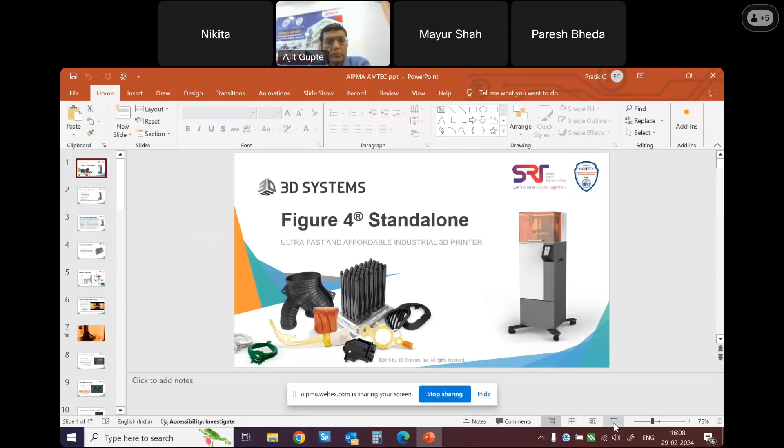Yes, it's visible. Figure 4 is the topic of webinar today, where we'll cover the Figure 4 printer, the technology itself, its material portfolio, the application, and how it is going to bridge the gap between industry and education. So let's get right into it.

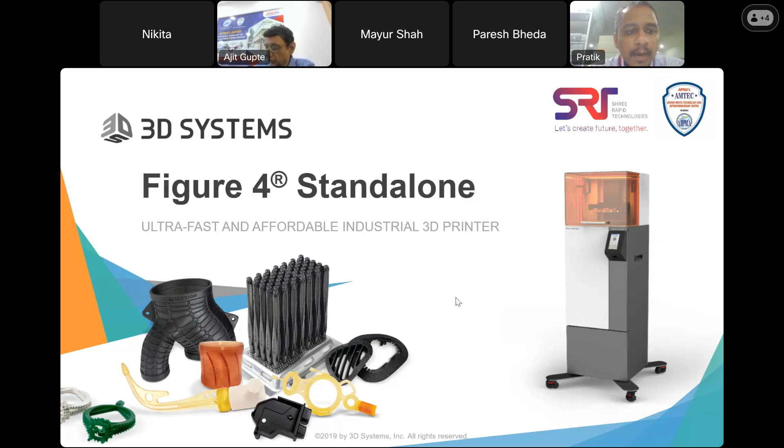Figure 4 standalone is basically an ultra fast and affordable industrial 3D printer. It's a printer based on DLP technology, digital light processing, which rapidly produces photopolymer parts. DLP uses projected light to cure photopolymer resins, curing the entire layer at once. So it's an affordable solution for functional prototyping and low production volumes.

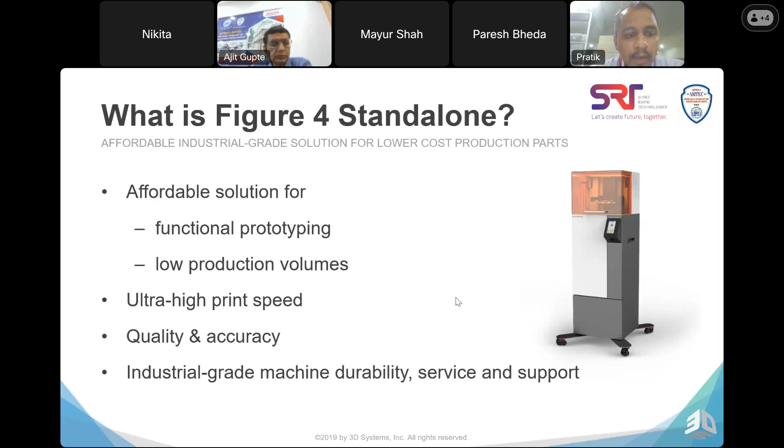It also has ultra high printing speed, which I'll cover in the subsequent slides, explaining how it's able to achieve that kind of speed. And it is known for giving extremely good parts and accuracy.

The build volume of this printer is basically 125 by 70 and 196 in the height. It uses a true HD projector of 1920 by 1080 pixels. So the XY resolution of this printer is 65 microns, and you can produce parts with variable layer thickness ranging from 10 to 100 microns.

It comes with the proprietary software of 3D Systems, that is 3D Sprint, which is also 3D Connect capable. Basically, you can monitor your prints remotely.

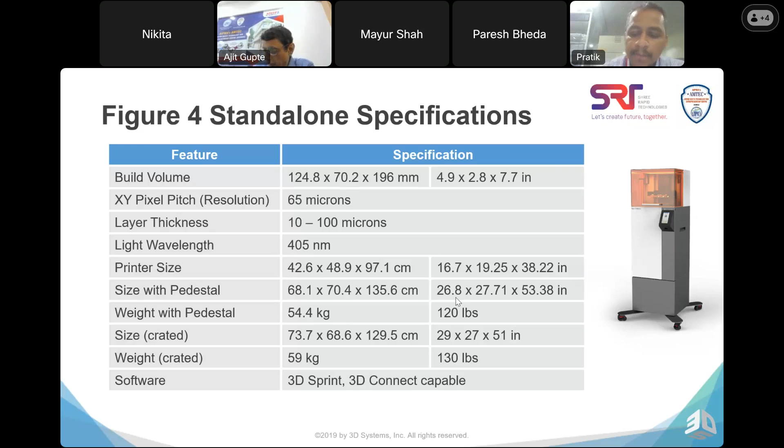So Figure 4 is basically productivity redefined. You can get functional prototyping iterations done within the same day. If you have low volume production, output volumes of up to 500 parts per month are achievable. And you have 3 printing modes, draft, standard, and premium, where you can achieve speeds of up to 100 mm per hour.

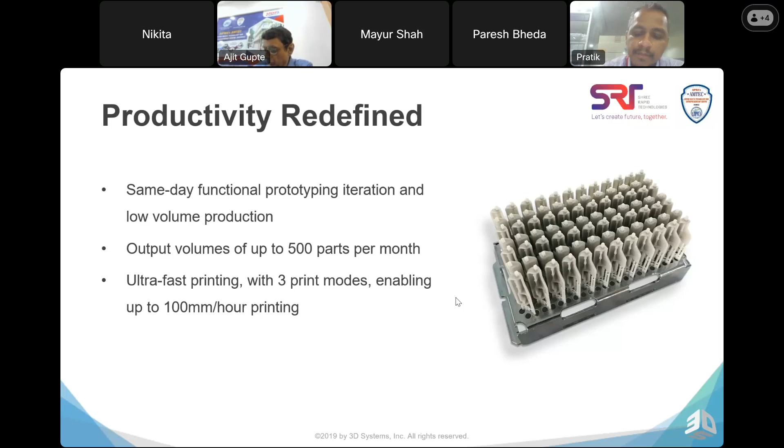Can you see the GIF image here? Yes, this is how the technology works.

Basically, Figure 4 is nothing but DLP printing. It uses a projector which projects UV light, magnified by the lens, covering the entire XY area of 125 by 70. The light passes through the film membrane of the resin tank, curing the liquid resin, which is basically a photopolymer resin. And as the build platform moves up, it prints layer upon layer.

Now the unique thing about this particular setup is that the film membrane of the resin tank is oxygen permeable. It forms a thin layer of oxygen window on top of the resin tank film, so when the resin is being cured, it won't stick to the film of the resin tank. Rather, it will stick to the build platform as the build platform keeps moving up.

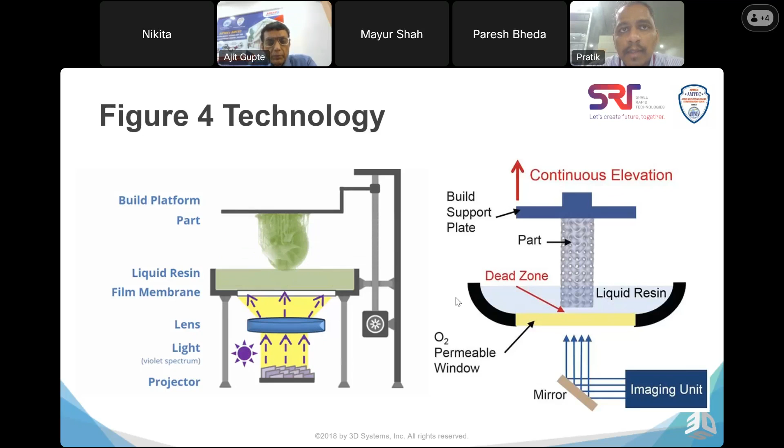So there are no peeling forces acting on the part. The part won't stick to the film membrane, so there are no peeling forces, and no pause in between where the part would peel off from the film membrane. So there is continuous elevation, and that's how Figure 4 is able to achieve ultra high speed printing.

Like I mentioned earlier, Figure 4 is used for low volume production, fast prototyping in tens and hundreds of parts per month. I'll just play the video here.

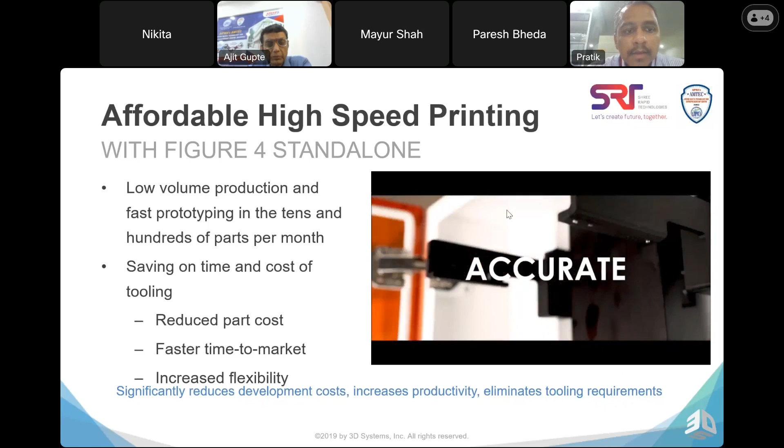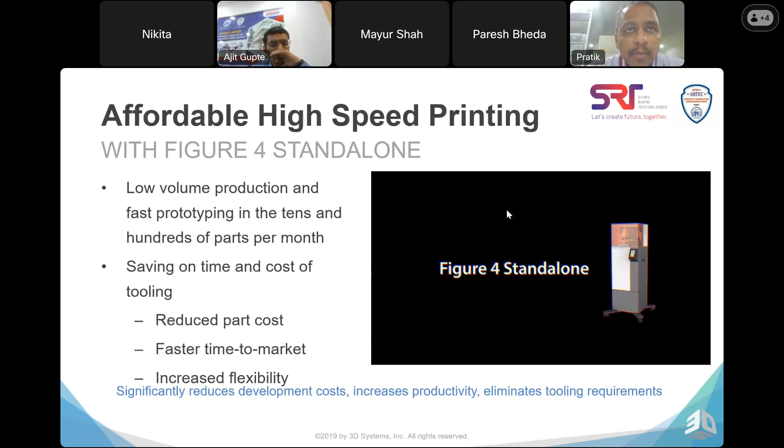So you can save on time and cost of tooling. The conventional mode of making prototypes would be to make tools, where you would inject plastics and get prototypes. So if you have to do multiple iterations, that would increase your per part cost. Rather, you can just 3D print your prototypes, do quick prototyping iterations, and save considerably on time and cost of tooling.

So there's reduced per part cost, and also you can market your products faster.

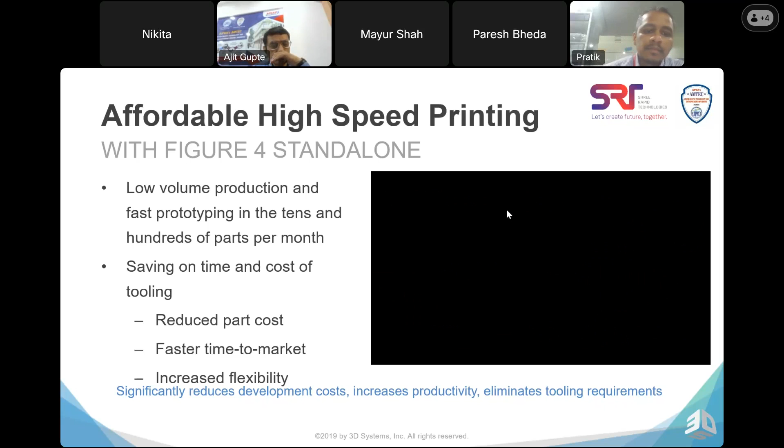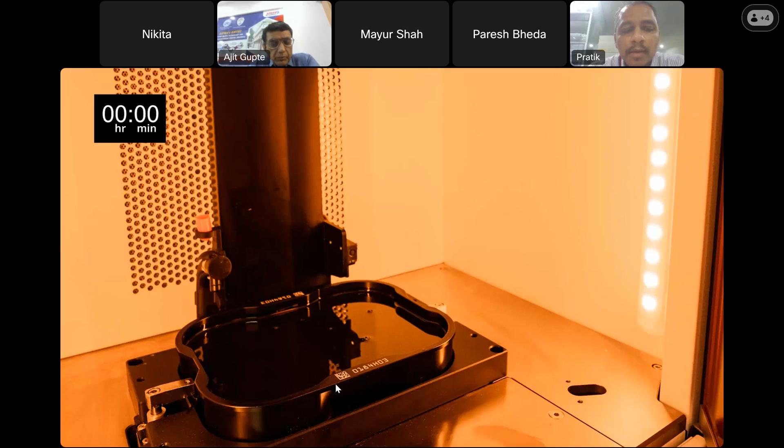I'll just play a short video of another variant of Figure 4 standalone. This is not standalone, this is Figure 4 modular, which is not covered in the webinar. The only difference between the modular and standalone is that this has a height of 346, standalone is 196, and also this has an auto resin dispensing system. I'll play the video and mention what I'm talking about.

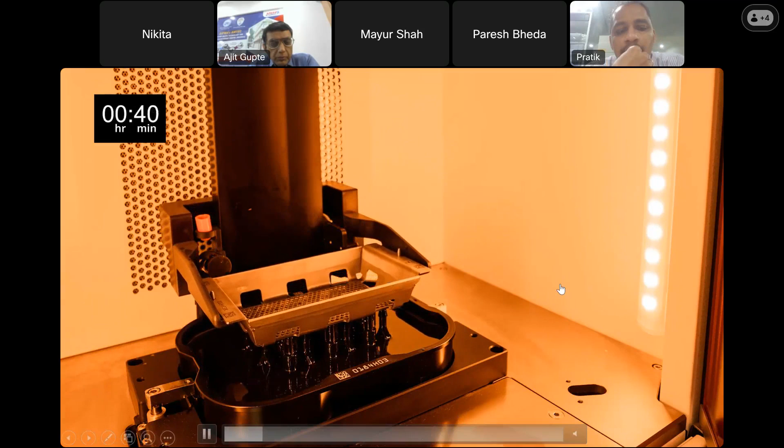The point being here, you can not only arrange the parts in the XY area, but you can also stack the parts in the Z direction, one above the other. So you can get increased throughput.

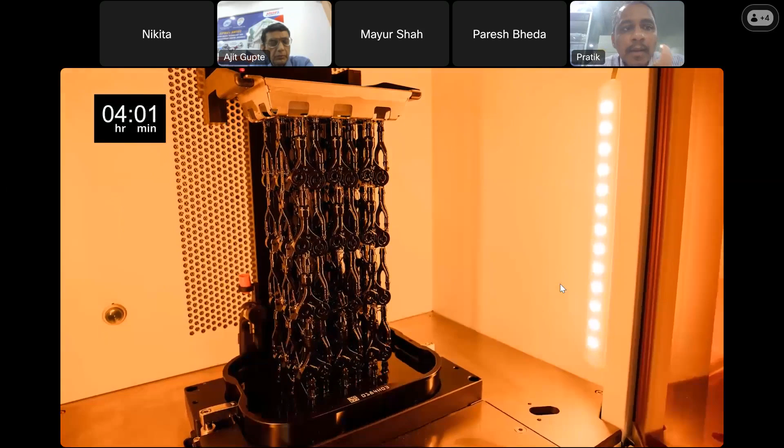Now you'll see here the print time is approximately 4.5 to 5 hours, and you got 120 parts within that time. So imagine these number of parts, whether or not they're achievable by conventional tooling methods.

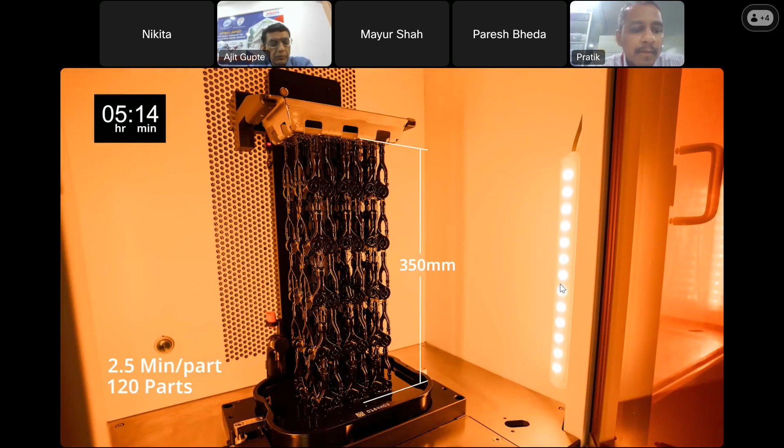When we compare it with room temperature vulcanization silicone molding, Figure 4 is quite affordable with reduced time to first part, compared to 6 days with RTV casting, down to only a matter of minutes with Figure 4.

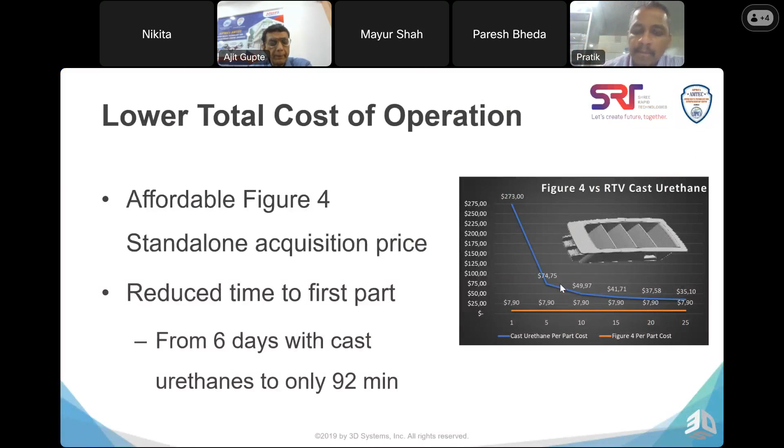It's also accurate to 6 Sigma. Figure 4 delivers on accuracy and repeatability. Generally you can achieve up to plus or minus 100 microns for the first 25 mm of the dimension. But through our experience, we were able to achieve accuracies of up to 10 to 50 microns plus or minus.

That's how accurate the Figure 4 printing is. You can see some figures here for a specific tough gray resin with a process capability index of 2.46. A CPK of 2 equals 0.002 ppm out of spec. So that's how accurate and repeatable the Figure 4 is.

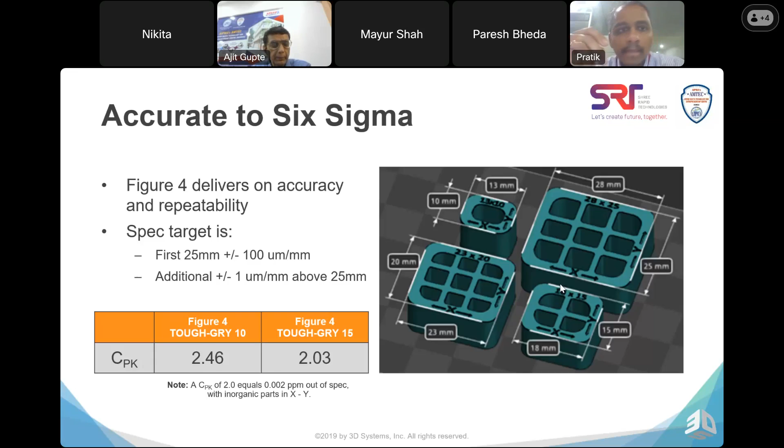As I mentioned earlier, Figure 4 standalone comes with the proprietary software from 3D Systems, that is 3D Sprint, which is extremely user-friendly with an intuitive interface. The file preparation for loading and printing is quite easy, even for someone who doesn't have experience with CAD or any kind of software. They will learn this software within a couple of days to a week.

To get more hands-on experience on the software and printer, you can enroll in IPMA's AMTEC course, or you can even book a demo at SRT's Customer Innovation Center here at Marol, Andheri East. So you can get a complete know-how of the 3D printing process, the workflow, right from build preparation to printing and post-processing.

And of course, 3D Sprint eliminates the need for costly software seats that are usually offered by third-party vendors.

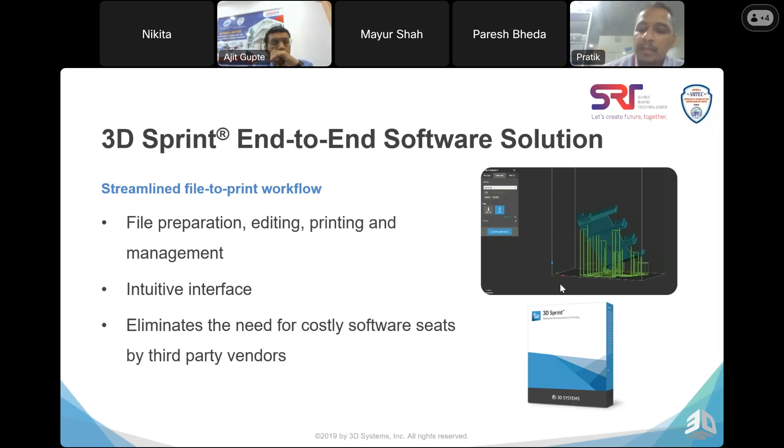Now we'll jump on to the Figure 4 material portfolio, that is the kind of options that are available with Figure 4. Around 14 engineering materials are available with Figure 4. We'll go through some of the major ones which are majorly used in the market.

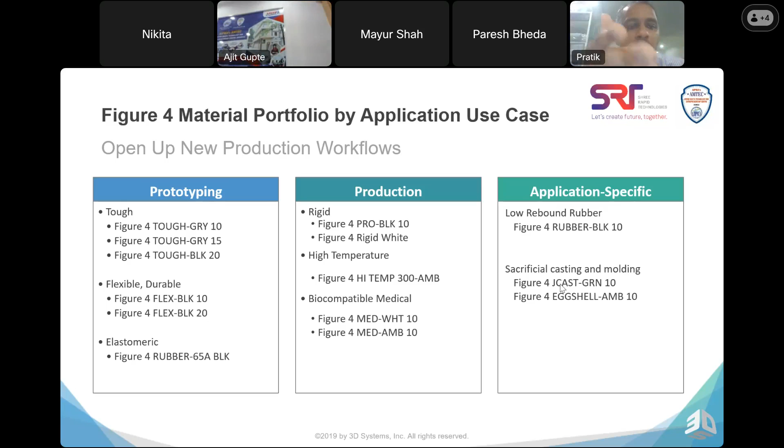Roughly they are categorized into prototyping, production, and application specific. If you have to use tough ABS-like materials, I want to stress that these are not thermoplastics basically. These are photopolymer thermosets which simulate the properties of end-use thermoplastics like ABS, PP, or PC. So if you need properties of ABS, which is your end-use material, you can use one of the tough ABS-like resins to build your prototypes, and then probably simulate the results with that of actual thermoplastic ABS.

For general use, ideal for prototyping and modeling, we even have translucent and semi-transparent materials which simulate the properties of acrylic, PMMA, or PC. There are also castable and sacrificial materials with which you can cast metal parts.

Tough ABS-like or durable PP-like materials which resist breakage for assemblies. Even high-temp materials are available which can withstand temperatures over 300 degrees Celsius. Dental and medical materials are available, and of course low shore, elastic, and silicone-like options with rubber-like materials.

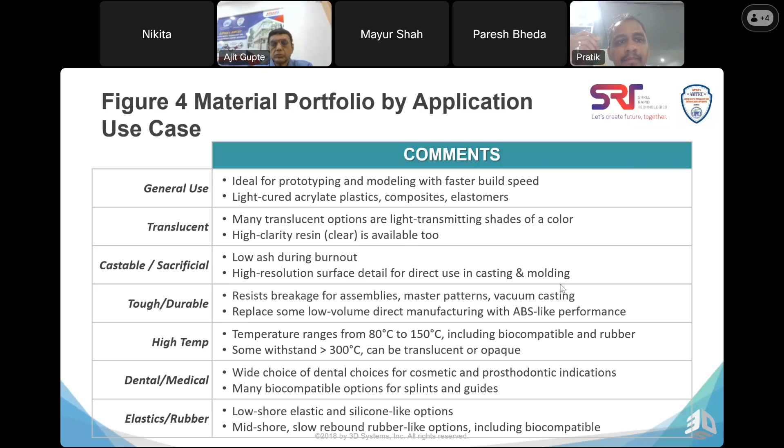To start with, Figure 4 Pro Black 10 is basically your go-to material for production of plastic parts. Go from CAD to manufacturing line in one day with toolless same-day production. It's a high precision resin producing parts with a smooth surface finish and exceptional sidewall quality, and it has excellent mechanical properties. So this is the most versatile material that 3D Systems has come up with.

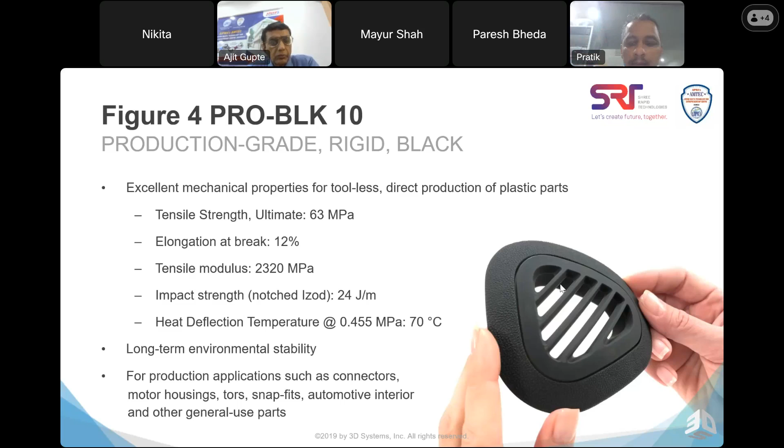Generally speaking, it simulates the properties of an ABS PC blend. Where you would want ABS-like properties, it works fine. Where you want PC-like properties, it still works fine. So this is the most versatile material that 3D Systems has come up with.

Another material is rigid white. If you want same day production grade opaque white rigid plastic parts with biocompatibility, polished surface finish, and long-term mechanical properties stability, this is your go-to material. Applications include electronic enclosures and small components, parts or devices, motor housings, and of course snap fits. It's quite difficult to achieve snap fit parts with thermoset resins, but we have been able to achieve it with rigid white, rigid gray.

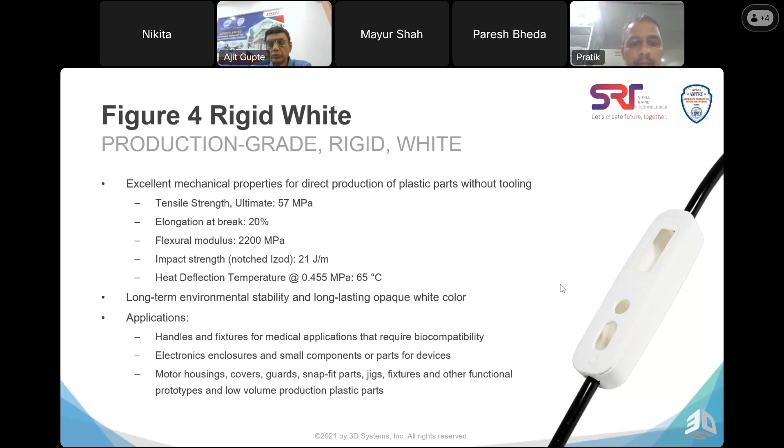This is one of the most unique materials of 3D Systems, which is the High Temp 300 Amber. It's basically an ultra high temperature resistant material with no secondary thermal post cure required. It's used in applications which require high heat resistance. It can withstand temperatures of over 300 degrees and has a modulus of 4000 MPa. It is well suited for testing of high temperature components in applications including HVAC, consumer appliances, motor enclosures, stators, and molds.

We have actually printed a mold insert with this material where we were able to inject around 100 PP parts. We designed a closure, a bottle cap, and made a mold insert out of it, and then we tested it. We were able to achieve around 100 samples.

Depending on the design complexity, you can produce a small batch of parts ranging from 20, 50 to even over 100 parts. Of course, it won't work like a metal injection mold tool; however, you'll have to compensate for the high temperature and injection pressure. So it is always possible. You can validate your part designs and your mold designs with this material.

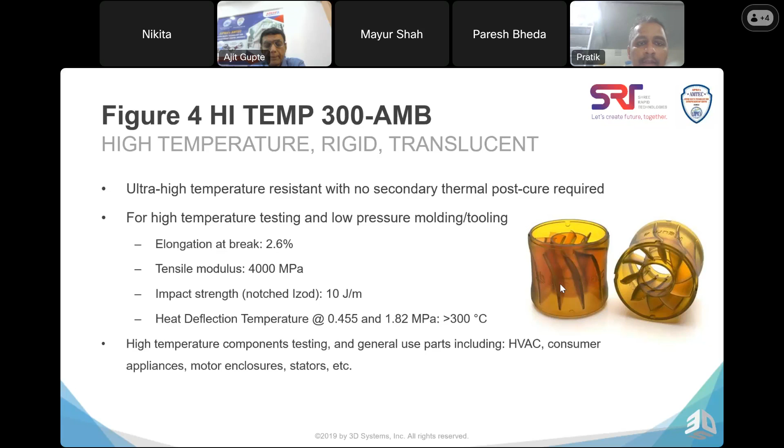Figure 4 Med White 10. This one is a rigid white material for a range of medical and industrial applications, including where biocompatibility is needed. This is also sterilizable by autoclave, and suitable where thermal resistance is required over 100 degrees. It delivers parts with excellent feature resolution and high definition.

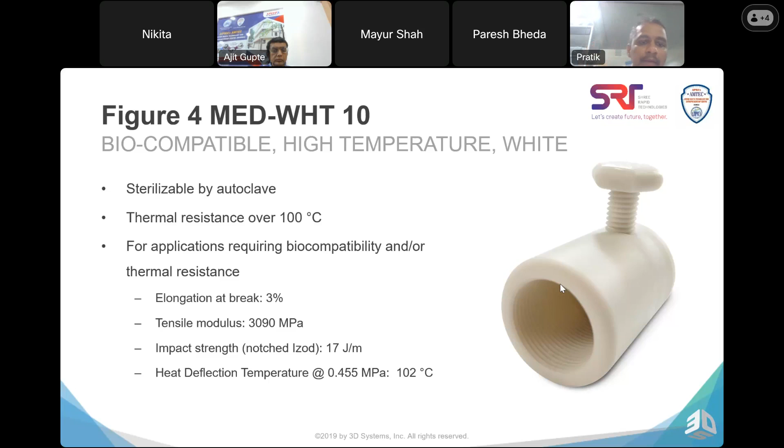Another one in the same category is a rigid translucent material for a range of medical and industrial applications, where it is translucent so that you can visualize the fluid flow. It also delivers parts with excellent feature resolution and high definition.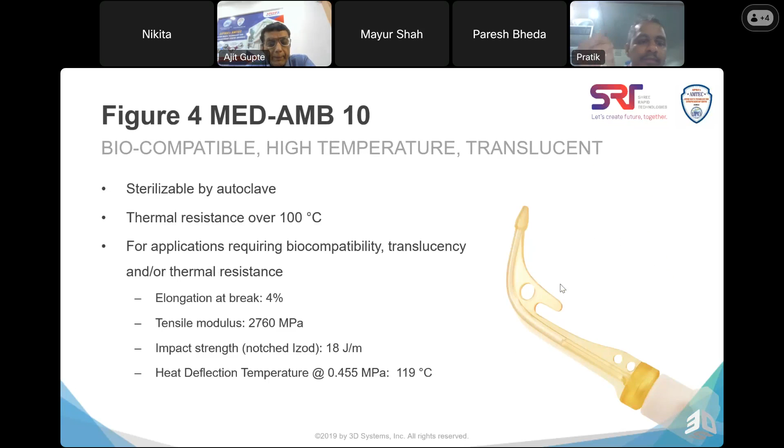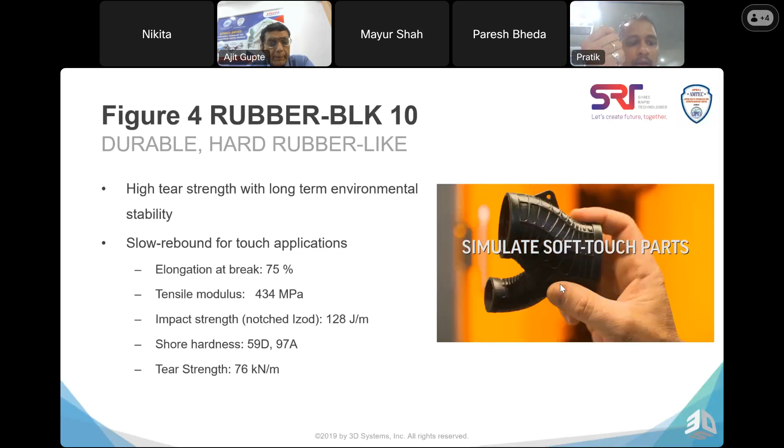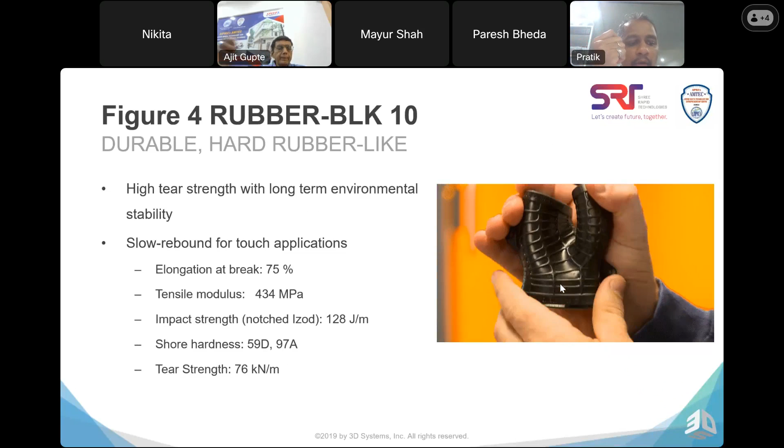Where you need high tear strength with long-term environmental stability, this is one of the unique materials, Rubber Black 10. It has high tear strength for hard rubber-like parts with slow rebound for touch applications like grips, handles, and bumpers, etc.

Eggshell Amber is a process-optimized material for production of sacrificial tooling for casting silicone and other materials. It is specifically engineered to withstand liquid silicone injection at high temperature and pressure, and has intentional brittleness to shatter easily from silicone once the mold is filled and cooled. Its amber color allows for visualization of the injected silicone, and it also has a high heat deflection temperature, which are preferred properties for injectable molds.

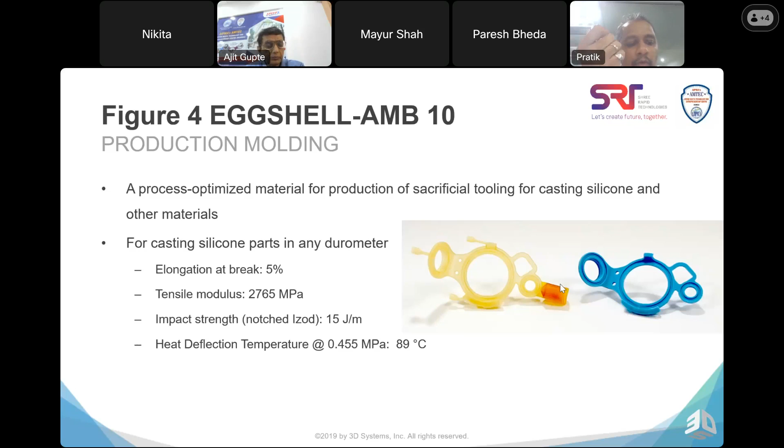And these are from the tough ABS category: Tough Black 20, Tough Gray 10, Tough Gray 15. These are basically ABS-like materials. They give the look and feel of injection molded ABS with long-term environmental stability.

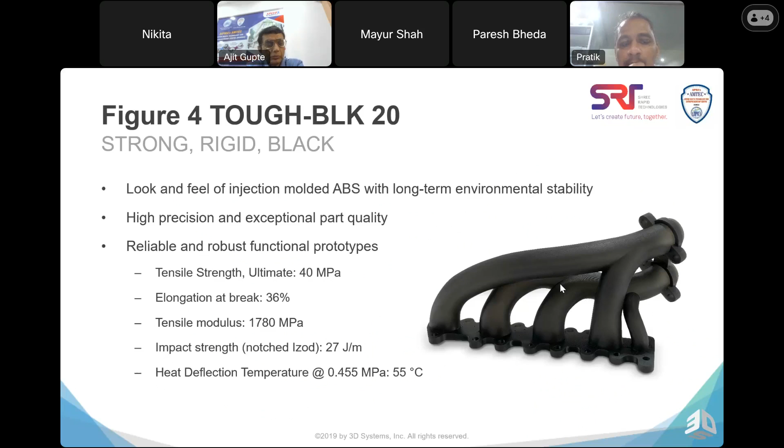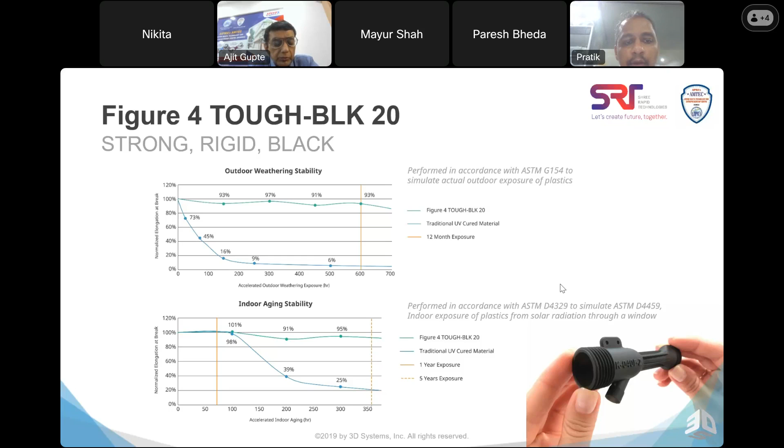Now, every material from 3D Systems has been tested for long-term environmental stability. When these materials are used for indoor applications, they will last for up to 5 to 8 years. If used for outdoor application, the life is up to one to 1.5 years. Since these are photopolymer resins, they are sensitive to direct UV exposure, so their life would reduce if used outdoors.

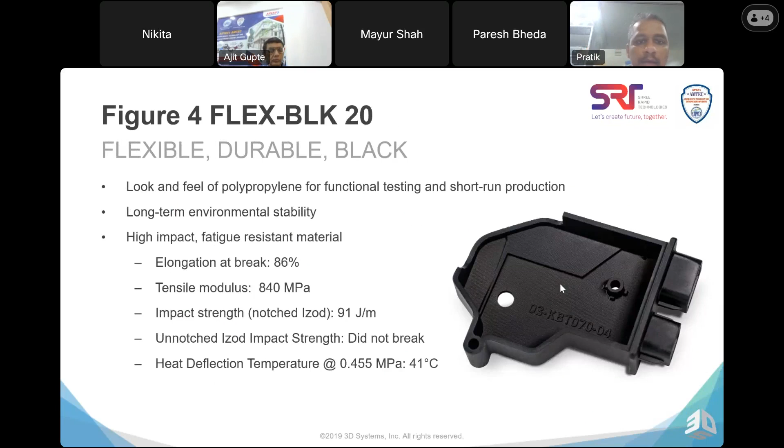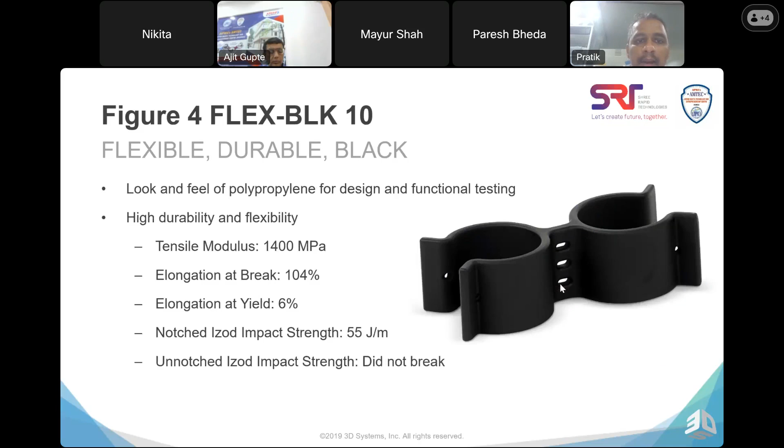There's a PP-like material, Flex Black 20, which gives high durability. Another one from the same category is Flex Black 10, with high durability and flexibility. I'll run a video here so that you get to know what I'm talking about.

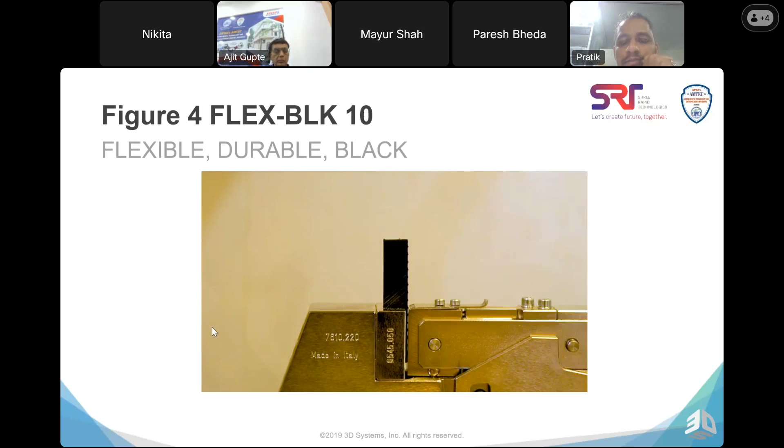There has been so much material development that earlier, people would use resin-based 3D printing systems only for the purpose of aesthetics, form, and looks. But 3D Systems has come up with so many materials now which you can actually use for testing functionality, not just form and fitment, but also functionality, replicating the properties of end-use thermoplastics.

Another material which is rubber-like, having a shore hardness of 65A, is ideally used for prototyping grommets, seals, hoses, sealings, keypads, and any kind of vibration dampening components.

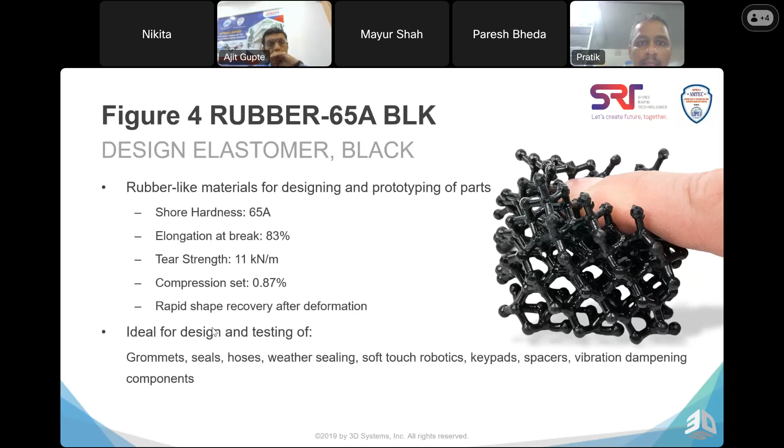J-Cast Green, for jewelry applications, is optimized for investment casting of jewelry patterns.

So to sum it up, these are the material options available with 3D Systems Figure 4 standalone. There's a resin for almost every application there is. It covers the entire application range, and you have material options which match the properties of end-use thermoplastics, be it form, fitment, or functionality. There's definitely a resin available which you can use.

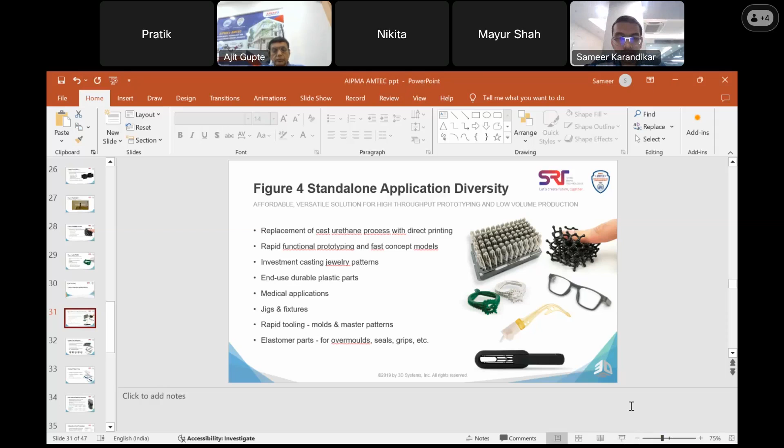Sorry to interrupt, are you shifting the slides? Yes, because we are not able to see it. Can you just stop? Now it's better. Are you able to see this slide? Which figure is this slide? It's application diversity actually. Yes. Did you full screen the slide? Is it working? Oh, not really. Okay, just one second. Are you able to view it now?

Yes. Right, okay, so as I was saying, Figure 4 has got a lot of application flexibility, and you can see here that there are different types of products shown. A few of them show rubber, some engineering parts, something in jewelry, something in dental application, as well as something in silicon molding.

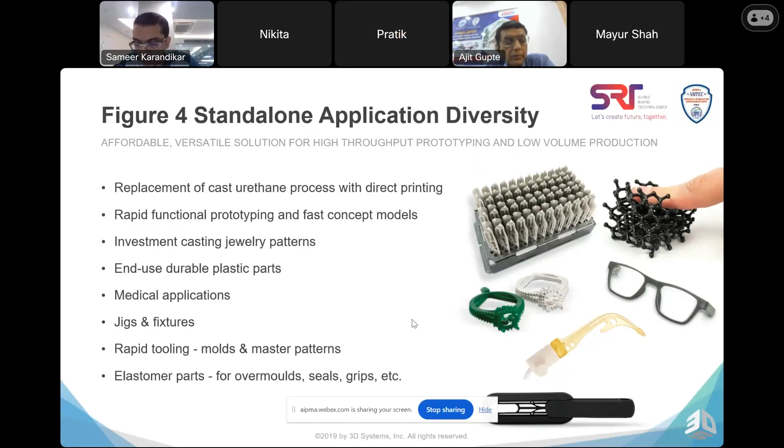So let's discuss what we can do with these applications. The software 3D Sprint has a feature which lets you add texturing to your parts. By adding a texture, it will basically replicate the end use quality of the material and also hide all the 3D printing lines that may be visible by some traditional technologies like FDM. So by using the texturing tool, you can create injection molded quality parts, or parts which can definitely hide the fact that they are 3D printed. It can also help you recreate the end use feel and form of the part you are looking to achieve.

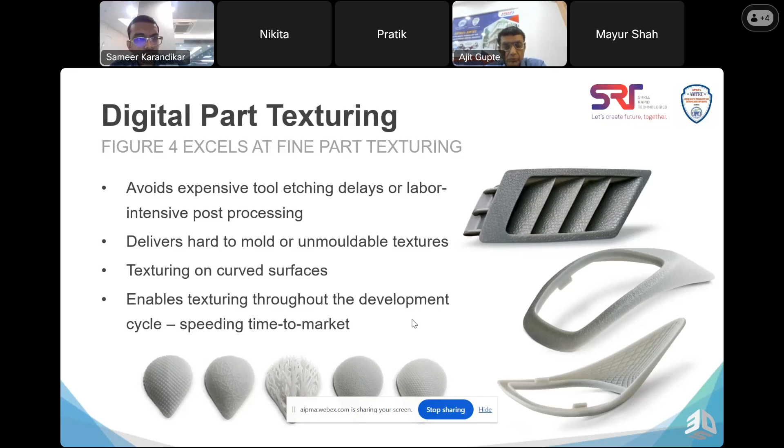The next thing you can do on most of these 3D printed plastics is dyeing or painting, or even electroplating those parts. One case study here is these spectacles that were printed. If you observe the lens handle and portion, it's actually a lattice structure that is generated and only made possible to manufacture by 3D printing in one go. These parts were printed and then basically painted. This helps quite a bit because you get all of this factor compressed into a matter of days rather than weeks, or maybe in some cases months, to get the end use prototyping part.

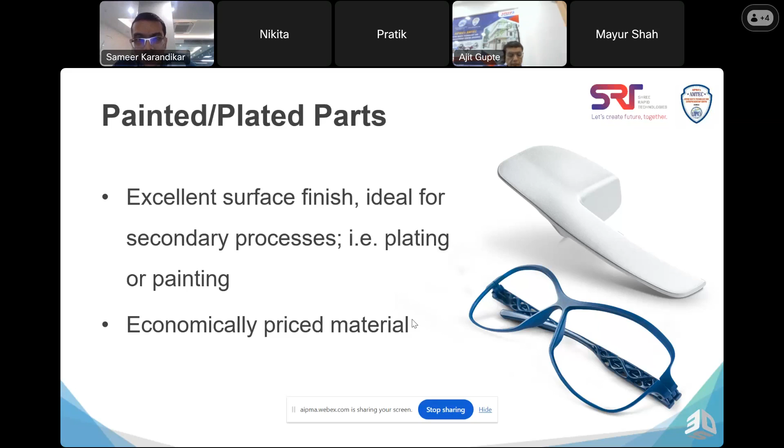So with these materials, it's very much possible to plate, coat them, or even color them, and consider them as your standard plastics.

This is a case study where Figure 4's tough gray 15, tough gray 10, and elastic black 10 materials have been used together to create an electrical connector, highlighting and showcasing the fact that on one single machine, by using multiple different plastics, you can actually recreate something like the part shown on the right side.

The printing speed of all these parts is very high, about 50 per hour. If you assume the height of this part to be around 50, within an hour you can get all these three parts printed. If you see the small chart shown at the bottom, the total build time required to make this entire assembly is somewhere around 3.5 to 4 hours. So in this case, you can literally get any of your ideas from design into production, and make your design to manufacturing process pretty efficient.

Because of Figure 4's capacity to print using the same projector and the same platform, there is no hassle of changing the material tray or doing other things like changing the membrane. So all of this is pretty easy, even for a layman.

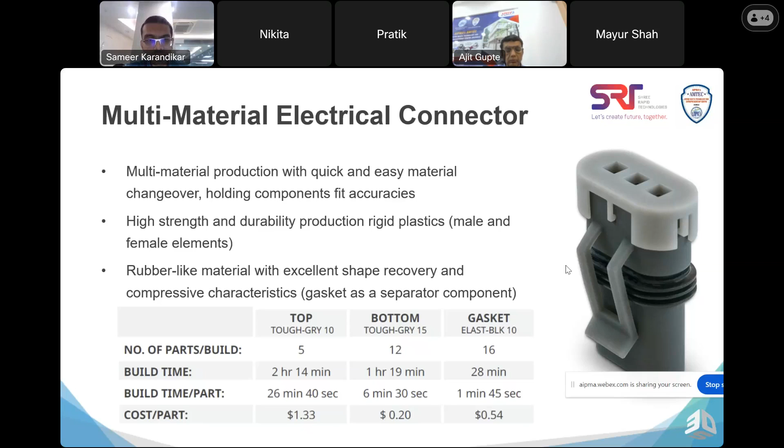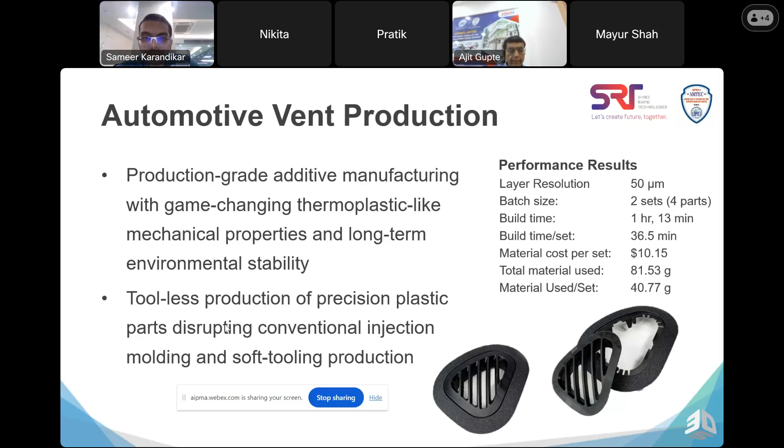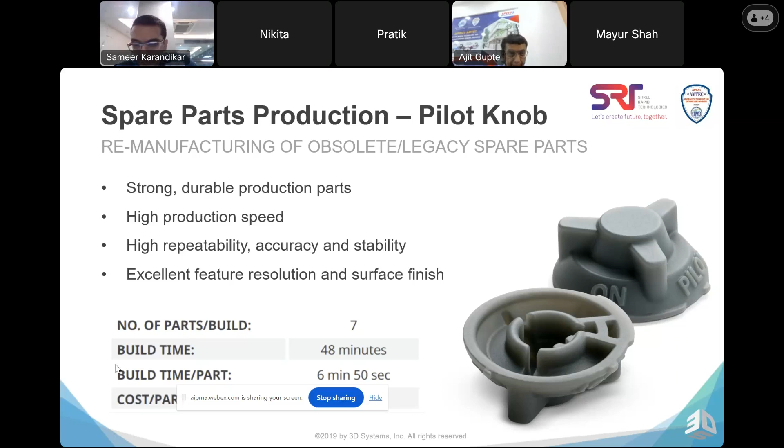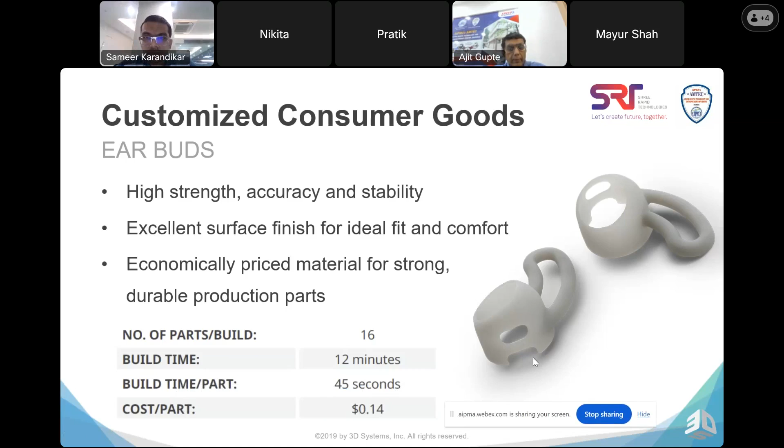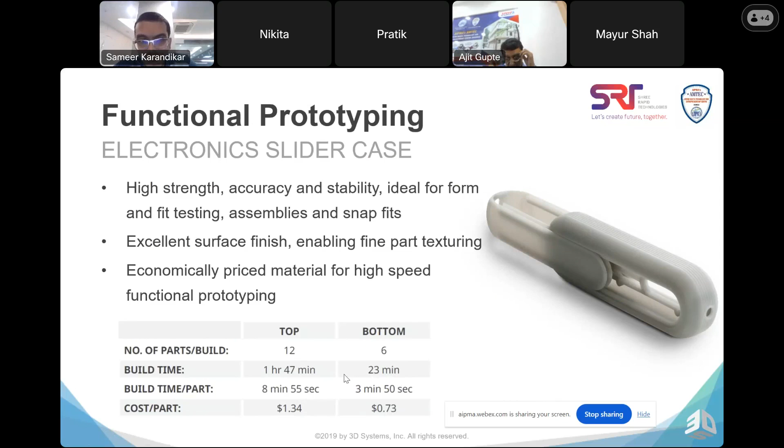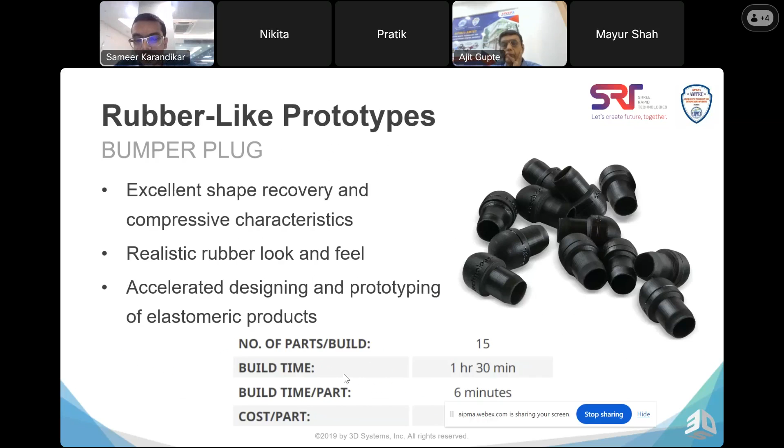Figure 4 also has rubber-like prototypes. We have two materials: Rubber Black 10 and Rubber 65. Rubber 65 is 65A and Rubber 10 is 97A. Depending on the parts application, you can create such small parts very quickly on Figure 4, and they provide excellent mechanical properties. All of these parts are very much production quality.

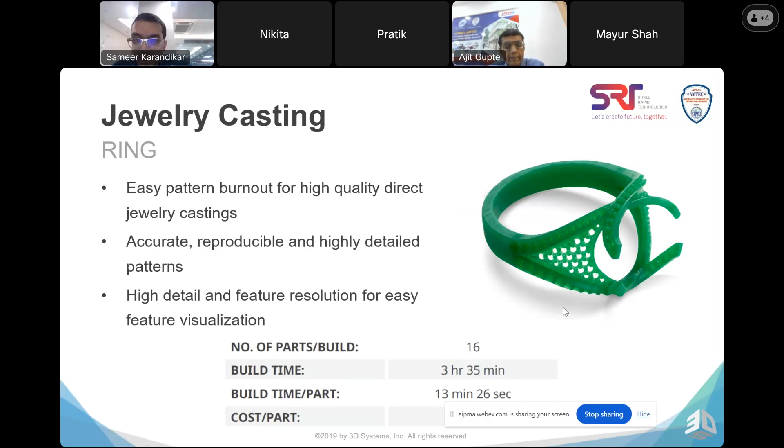Jewelry is also possible using Figure 4. There's a specific material which has a very good burnout-to-ash content ratio, so you can create precise geometries on Figure 4 and print them in these jewelry casting materials, then use investment casting to put in any metal you would want. If you look at the details of this part, you can see how closely the virgin features are maintained. So Figure 4 in jewelry is also pretty much an established application now.

So like I said, Figure 4 also offers materials approved by FDA in one of their classes, 1 and 2. So obviously these are biocompatible, but they aren't bio-implantable. There is a difference.

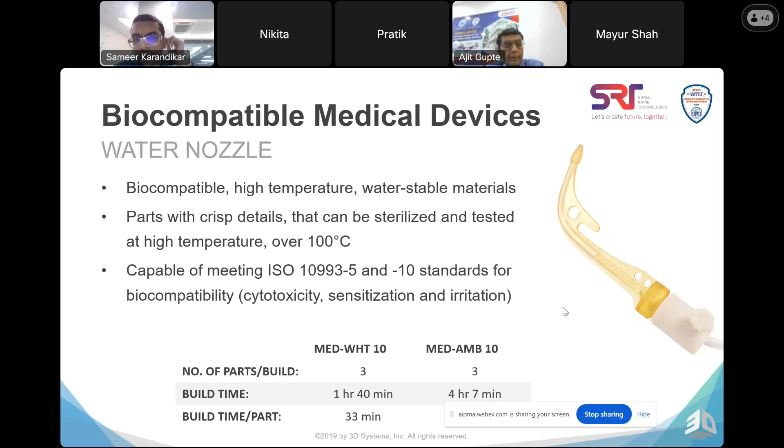With MED-AMB 10, you can get two different types of materials: one which is translucent, so you can observe the fluid flow inside the body of the part, and one which is Med-White 10, which offers much more thermal stability and can be used for medical equipment. They have a pretty high heat distortion temperature, so you can be assured they are autoclavable and can also be sterilized.

So another example with earlobes: you can see here earbuds that have been custom printed using the Tough Grey 15 material, just to show how parts are printed in batches and in pairs, and such parts can be printed very fast, in about 30-40 minutes.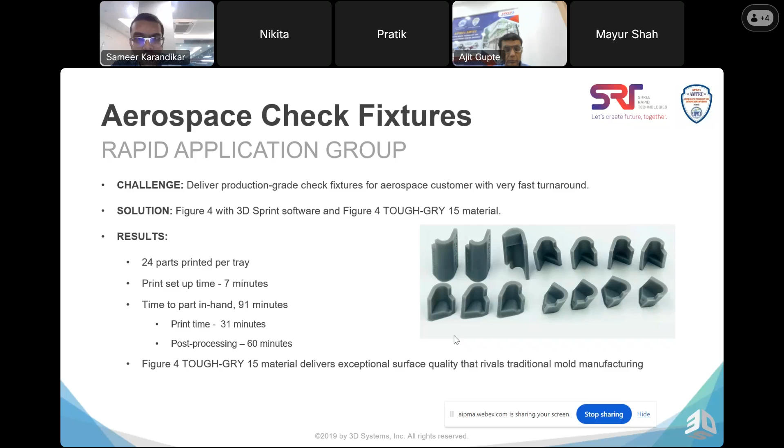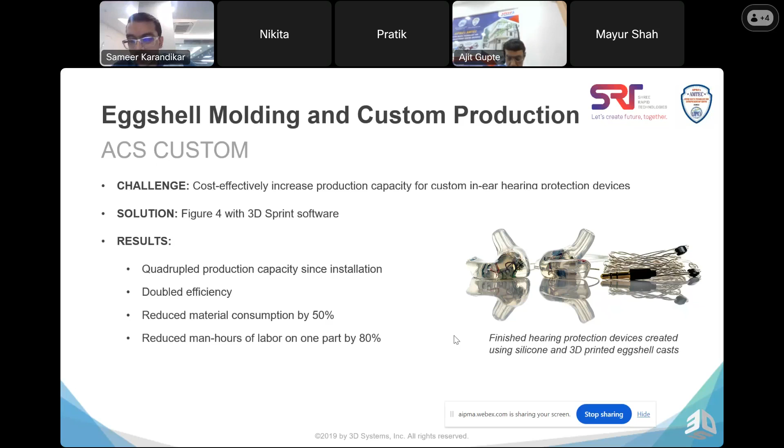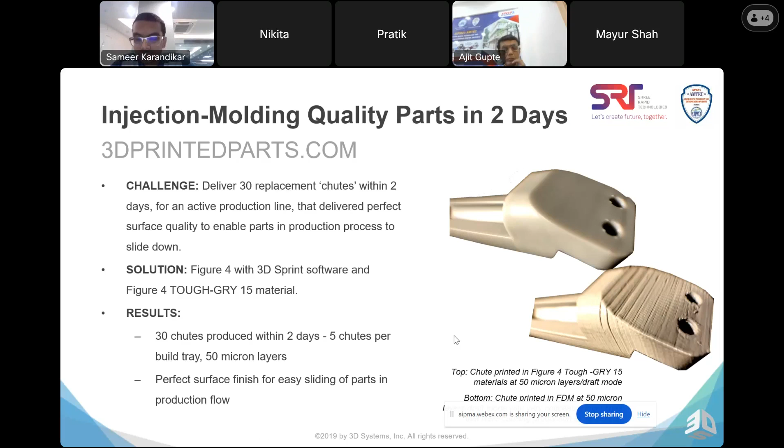The final comparison here is between DLP technology, a part printed on Figure 4, versus something printed on FDM. FDM inherently shows its layer lines, because the resolution on an FDM printer typically starts at 100 microns and goes up to a millimeter. But with DLP projection printers, you have high resolution in the z-axis, around 10 microns for Figure 4, going up to 100 microns. So the applications and the materials and part properties are justified, and we have to find where this printer can be put to use, because in most of the plastic industry, 3D Systems Figure 4 has found its way. That will be all from my side for this Figure 4 introduction.

But I would like to show you now how AIPMA's AMTEC 3D Systems Figure 4 course can bridge the gap between education and industry.

There has to be a starting point for a professional looking to use 3D printing in his setup, or a student who wants to make a career in 3D printing. 3D Systems has designed their own course on this Figure 4 machine, and they selected Figure 4 because it's a very good starting point for young professionals looking to make the switch to 3D printing, whether on the education side or industry side. It's a very easy machine to use, and the whole objective of using an Industry 4.0 system is to make sure human labor is minimal.

For the past 6 years, this Figure 4 machine has been running excellently. There are more than 200 installations in India, Tata ITIs are using it at full force, and the reports and feedbacks are extremely positive. Never has there been a case where this machine has failed in terms of mechanical or hardware failure. Because 3D Systems is the company that patented 3D printing way back in 1984, it makes sense to get trained on a program curated by them.

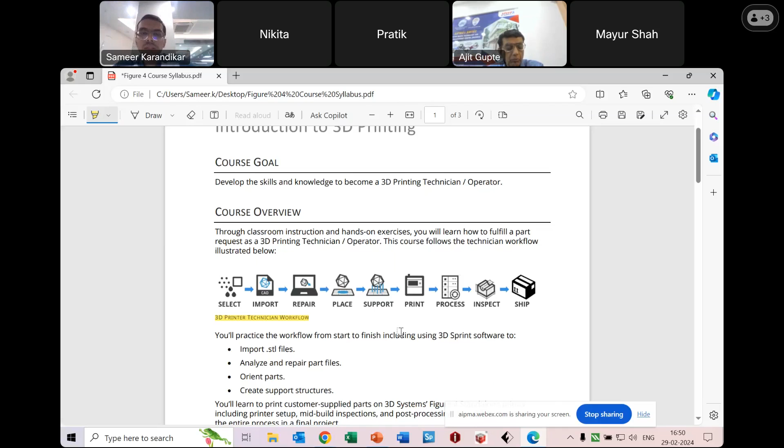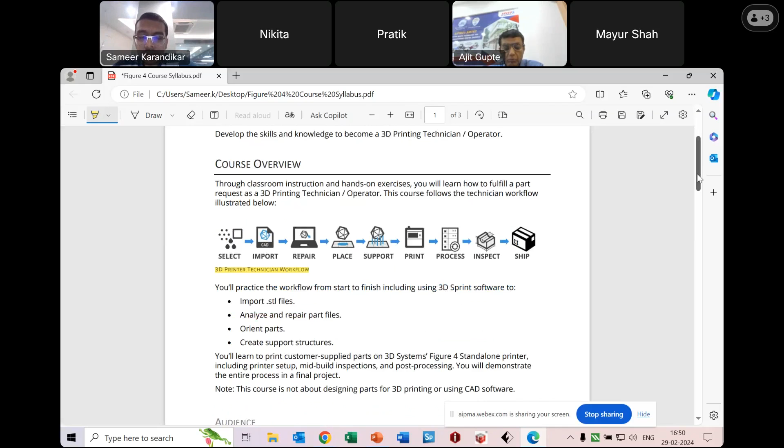The objective of this course is to develop the skills and knowledge to, at the very least, become a very good 3D printing technician. The typical role of a 3D printing technician is: you select the printer or the CAD file, import the CAD file, and if changes are needed in terms of design or repair, the technician does that on the software. Once the part is prepared properly, it's sent to the printer. In between, you can either support it, or if it's self-supporting, simply put it to print. Once printed, you use post-processing like sanding, painting, electroplating, etc., and then finally use quality control and ship it to the customer. All of this is taught in that program on the 3D Systems Figure 4 course, and each step is taught according to industry standards.

This is what you will be learning once you enroll in this course. You get hands-on with 3D Systems Sprint software, and with that software you get insight into how the world of 3D printing works. It's a very much industry-leading software, and there is no other software that comes even close to this. It's a very good starting point, to reiterate once again.

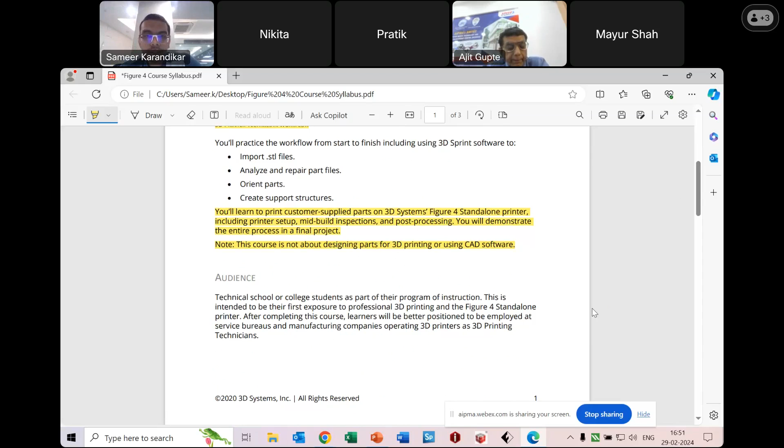So what is the target audience for this program? From our perspective, and having data analysis from students who have completed it, age is not a limit or restriction. Just somebody who understands English can participate in this program, it's as simple as that. Maybe some basic mechanical engineering knowledge is required, but that will be refreshed, revised, or even taught afresh in this program. All of this content is in the learner's workbook, so you can be assured that if you want to study at your own pace, you can study at your own pace.

And finally, upon completion of this course, you do receive a certificate which is directly coming from 3D Systems. So that's a very good standout ribbon on your resume. You never know, such things might come to help in the future. And for young professionals, it's a very good starting point.